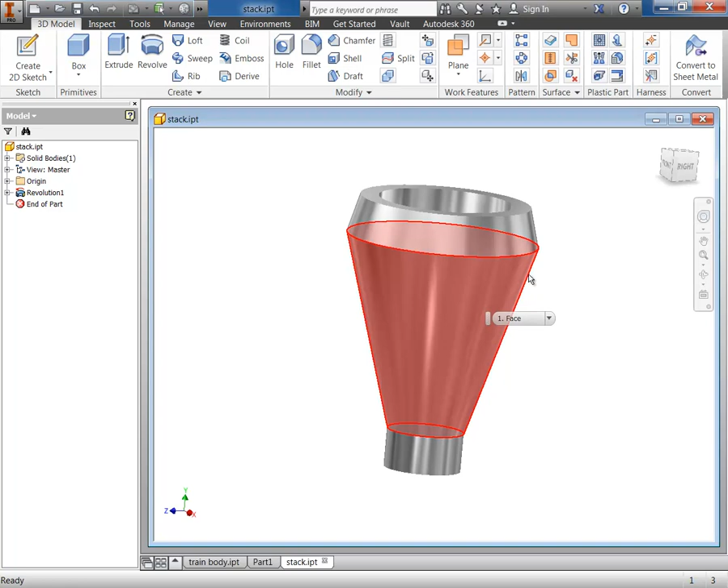Okay, so here's the smokestack. This is what goes on top of the train. This is the little puff of smoke coming out of a steam train. Or I guess it's the steam stack or whatever you want to call it. Anyway, this is what inserts into the hole in the train body.

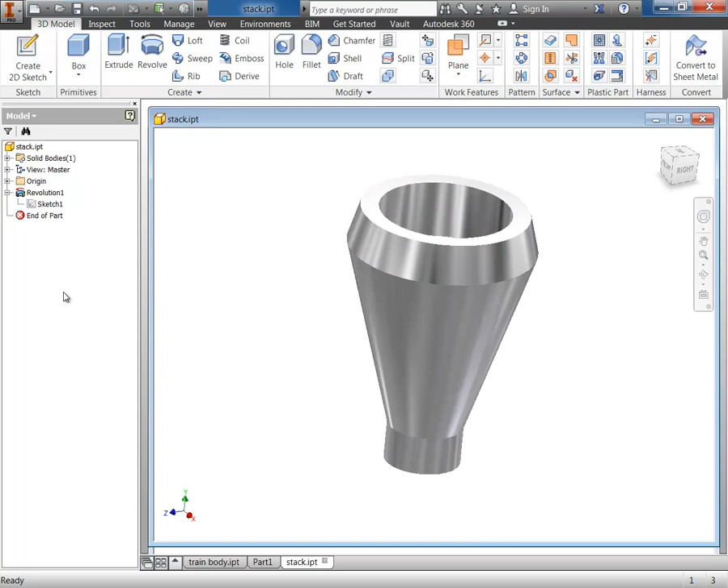So if we take a look at that, over here in my browser on the left-hand side, it's really not made from anything except one revolve. So it's actually a very simple part that looks very complicated. So let's take a look at the sketch that it's made out of. You'll notice that I have all these different dimensions on here, and the angles are all there. So it's actually a pretty straightforward sketch.

The part itself opens up as, let me pull up the drawing sheet that you actually will get. So the drawing looks like this. So you have some information. You have a hole callout right here. This hole callout basically tells you what type of hole it is, the diameter of the top step, and then the depth of that step.

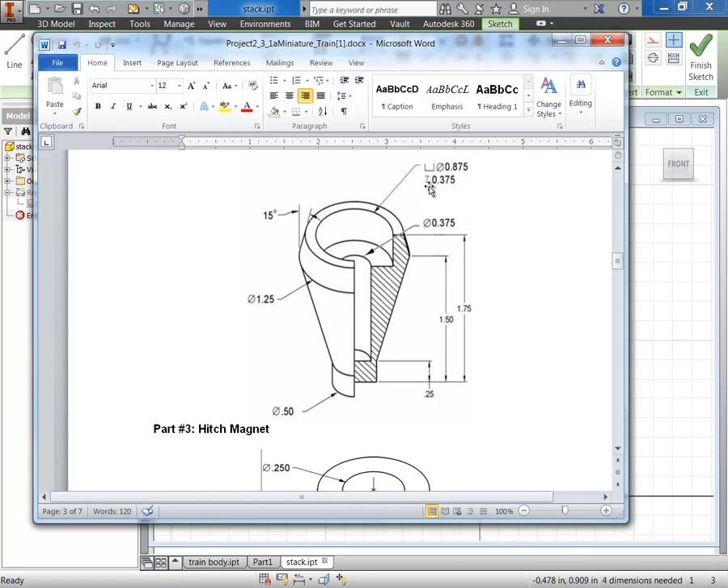Okay, so we've got that information. That tells us this information right here. Let me zoom this out just a little bit. We'll see if we can change this. So this information right here tells me how far this little step goes.

Okay. This information right here, so it says it goes down 0.375 and the diameter of this hole is 0.875. That means from my center line clear out here to there is half of 0.875. Let's see, this angle right here, so from this edge going up and in is 15 degrees, so I can mark that.

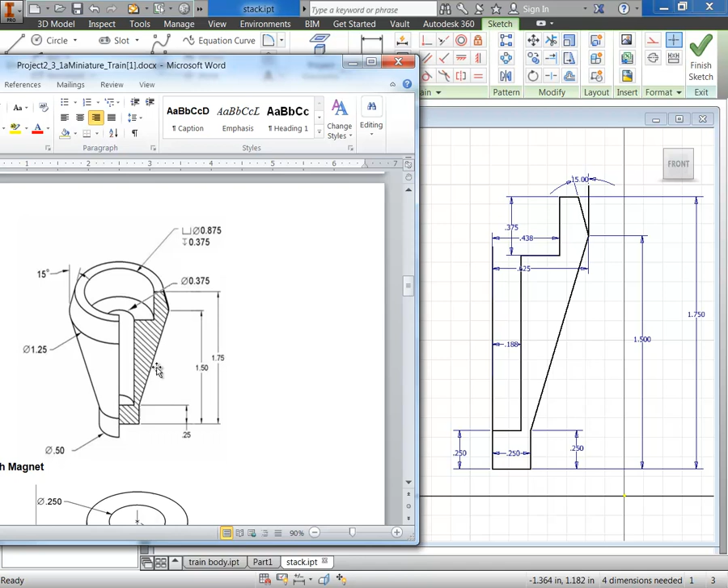I know the diameters, and you'll notice since you're doing a revolve, everything is based off a radius. So basically I'm just making the profile of this part that it shows right here, and I'm revolving it around and turning that into the smokestack. So let's see what that looks like if I create a new part. And it's actually pretty quick. I'll just do a new standard part. And again, I won't do any dimensions, just to make it kind of quick.

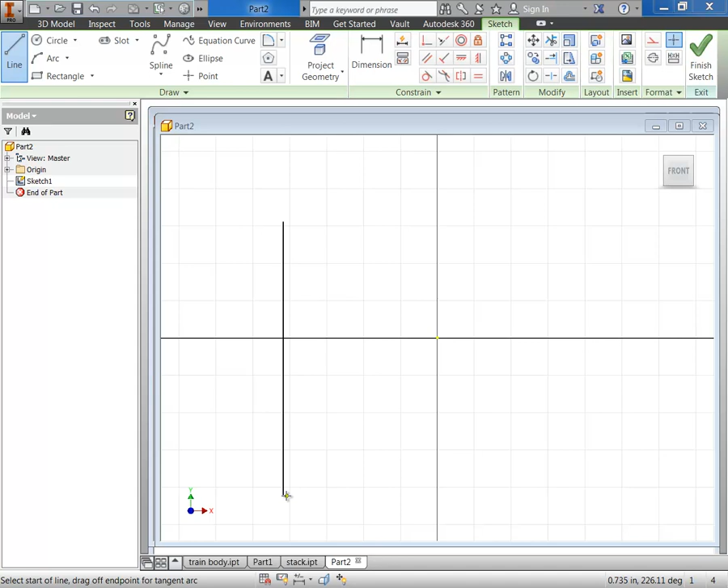I'm going to start with a reference line. And it doesn't have to be in the center. I do it off center just so that you can see where my line is. And then I'm going to use the line tool to go ahead and finish creating some of these pieces. And I'm just going to throw them on there because I'm not too worried about my dimensions yet. I'm just going to get an estimate.

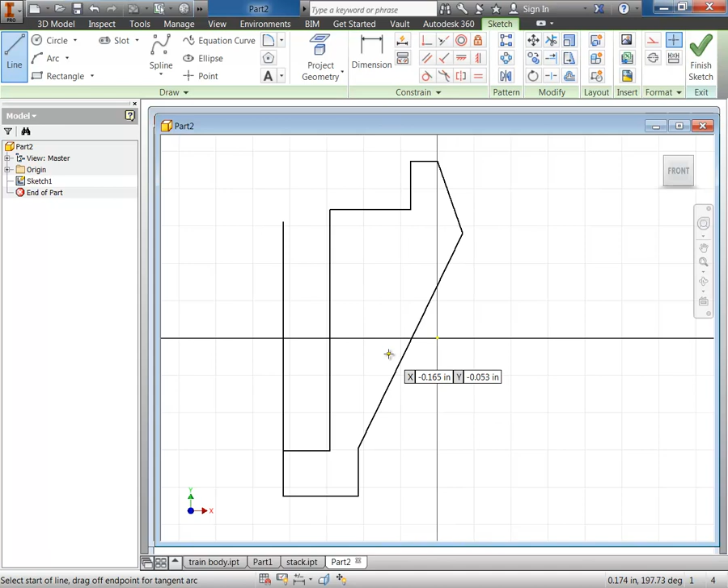And let's see, there's that. And it doesn't go down all the way. It's got a drilled hole and then it comes over. Okay, so that's just a basic outline. You would go ahead and dimension this and get all these lines where they belong, and then be able to finish your sketch. So from the revolve screen, remember it pops up like this. You can go ahead and maximize it.

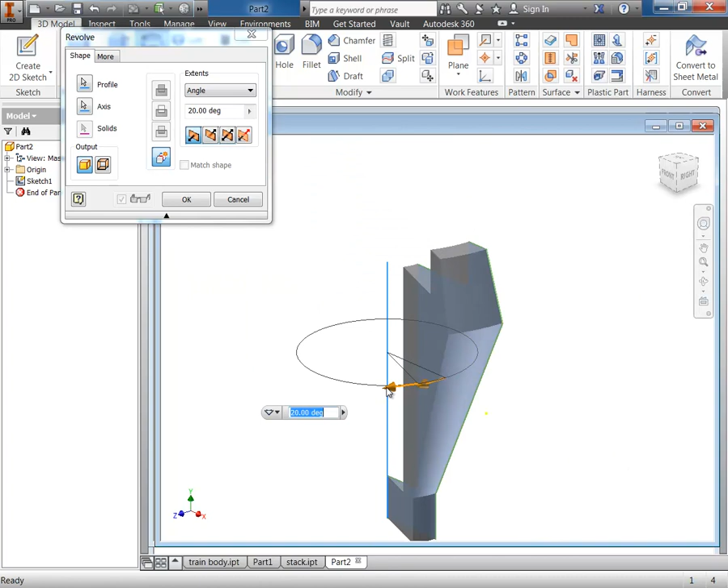I want to choose the profile, and then the axis that it's going to revolve around is going to be my axis line that I drew. And you can see it looks a little bit short and kind of funny looking, but what you need to be able to see is that you have revolved that sketch all the way around from a center point. So there's your marked center, and then the part itself, you have this profile that goes all the way around. Okay, so that's a smokestack. That's how you use the revolve tool.